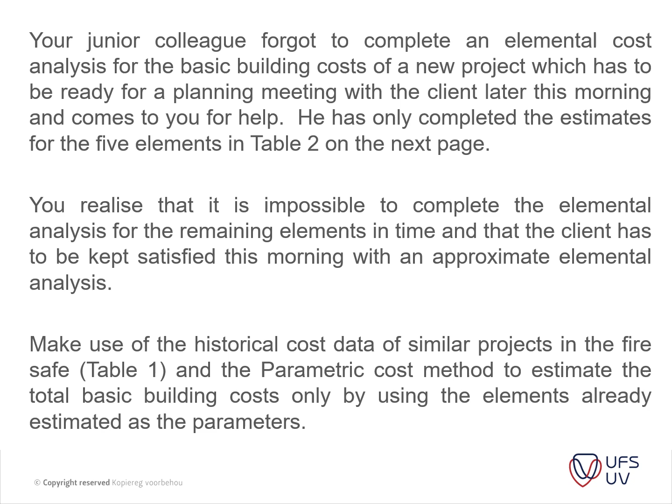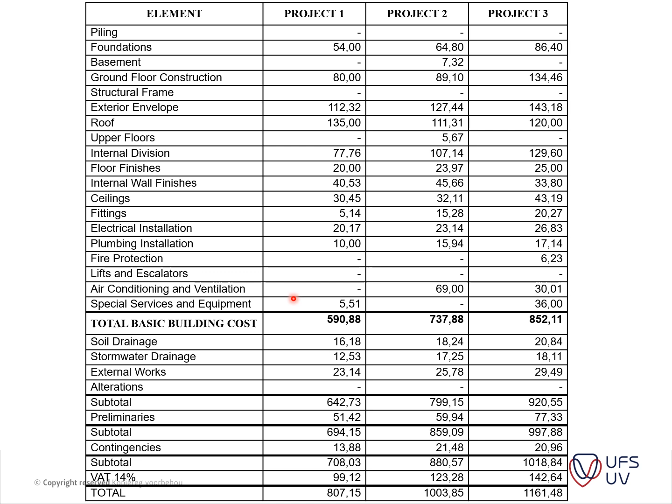Okay, so these are the 3 projects that are highlighted in the example. So we went through that previously. So you will see everything that's included here. So you've got project 1, 2, and 3 here, and then you compare what you have done so far in table 2, which is on the next slide, and then you just take out those items and utilize those items to get to the amount of work that you've done. So I'm not going to over explain that again. We've done it in the previous lecture.

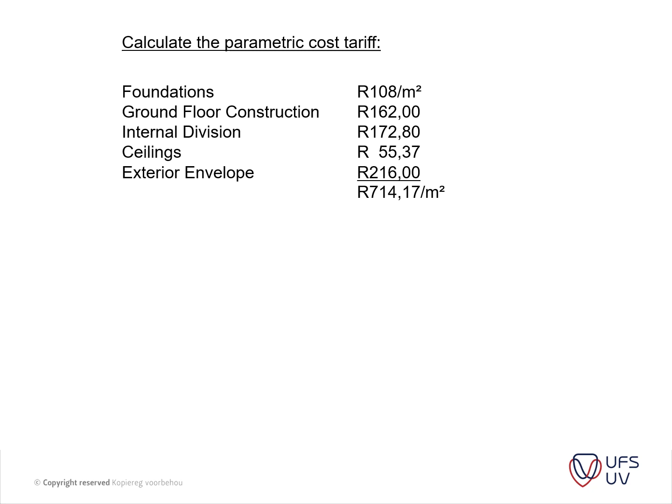So these are the items that you use, and then you continue to add up the ones that you've already calculated, and also see what your current rate per square meter is that you've calculated up to date. And then you go through the process of determining the parametric system. So from your table of the historical projects, you calculate what those items contribute, and you calculate the average price, and then you extrapolate that. Okay, so that's just a revision of last time.

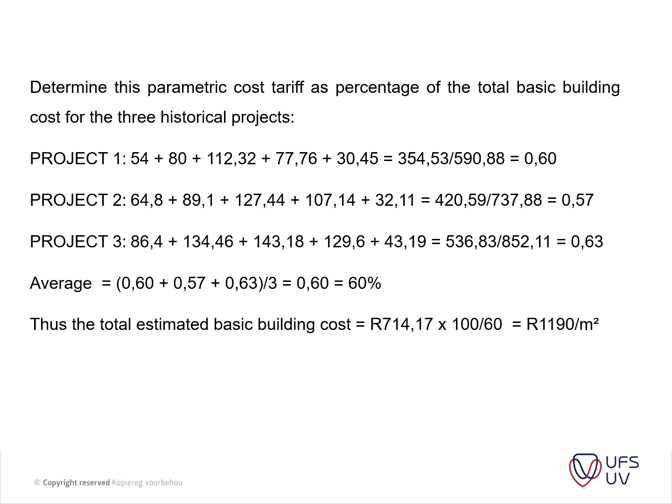So what I did with the residential students is to give them the following example. So this will be on the board, and then they've got the opportunity to actually complete the following. So if you want to do this exercise yourself, you can stop the presentation here, and then just do the estimate based on this as an exercise before I show you the answer on the next slide. So that's what the residential students did in class. So you can just have a look whether you are proficient with this, and then just mark your own estimate.

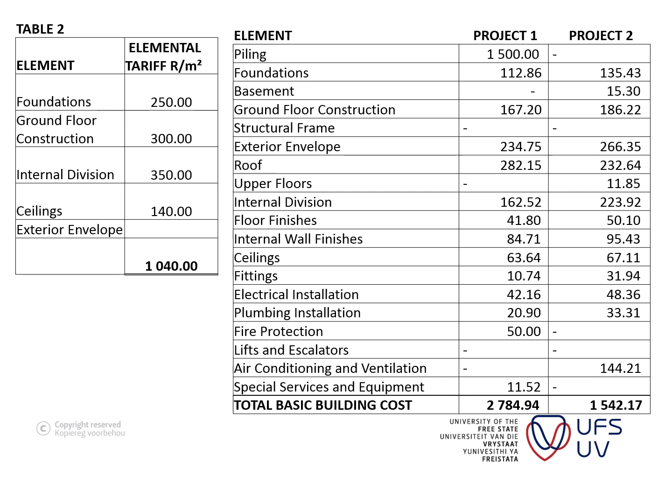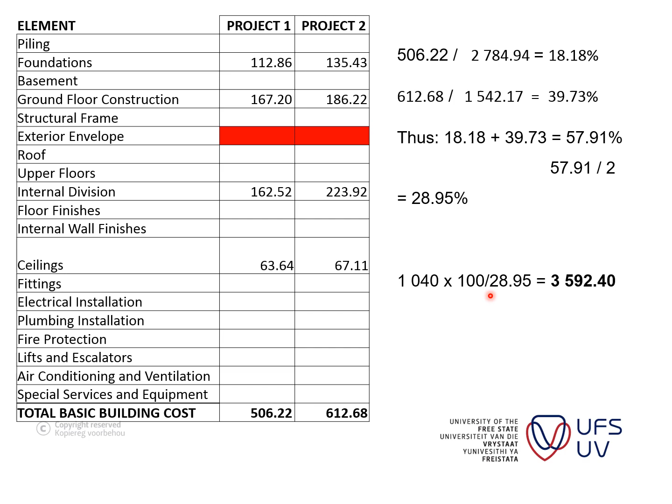Then for today's lecture, I'm just going to cover the last bit of the estimation methods and the theory of that before we actually start getting into the practical example. So you will have the opportunity in the next week. I'm going to post the first informal, if you want to call it that, so that you can start getting through that. So the detailed methods are the elemental cost analysis method up to component level.

Okay, so we've looked at the analysis method so far. Then the comprehensive quantities method. So the comprehensive method, we're going to delve into that, very similar to your accurate quantities. Your accurate quantities will be your BOQ that you produce and that you go out on tender with. So they are obviously more complex estimation methods than the previous ones. They take longer to complete and are the most accurate of all the methods.

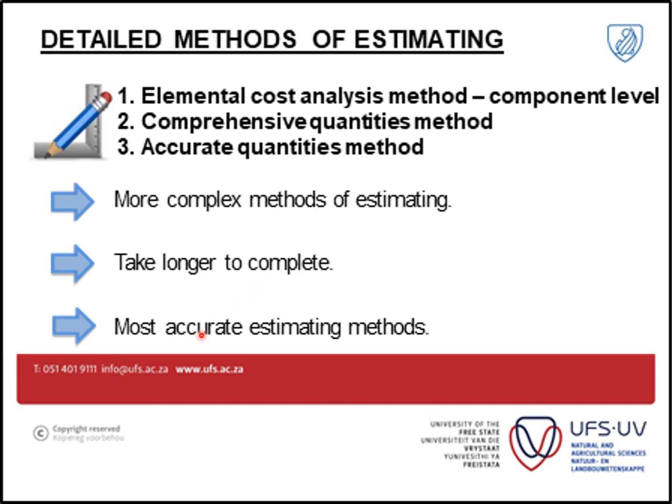So looking at your elemental estimate method first, we're going to spend some time on this after today's lecture still. So this is just the overview and the theory part of it. So it is divided into different subdivisions or components. Your component amounts are real amounts of different components expressed in a suitable quantitative unit of measurement, and the component tariff is the monetary value applicable to the different components expressed in terms of a specific unit.

So here's where you have your grouping of your elements that are related to your trades in your BOQ. Okay, so if you have a priced BOQ, you can easily calculate your elemental rates or tariffs that you need to include. So its possible applications are considerable savings in time if you have a proper setup. So I'm going to share an example with you on Excel that you can use whenever. WinQS also has a nice example that you can use, which already has the necessary links, but some of you might not have the opportunity to actually download WinQS.

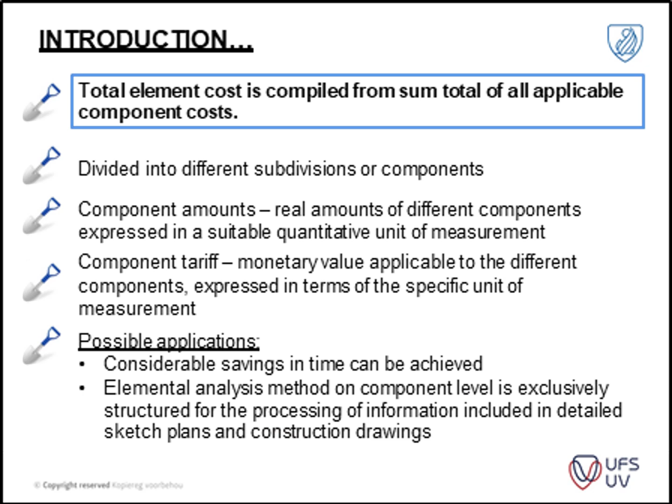And then the elemental analysis method on component level is exclusively structured for processing of information included in detailed sketch plans. So obviously you need a lot of detail to do an elemental estimate at component level.

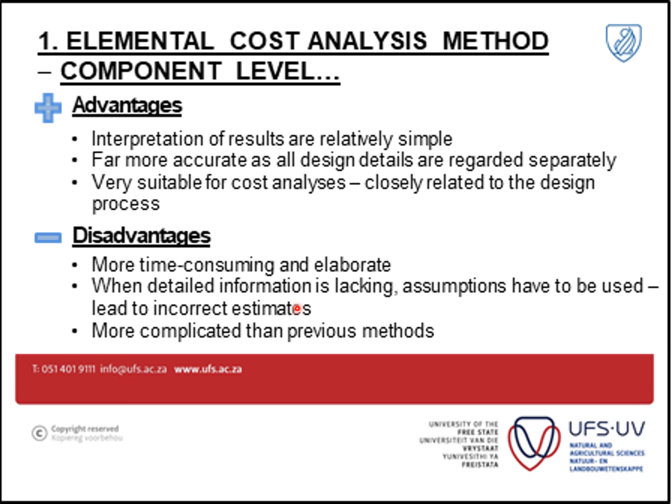So the advantages: the interpretation of results is relatively simple, far more accurate than the previous methods, very suitable for cost analysis, closely related to the process. The disadvantage is the time that you need. When detailed information is lacking, you have to apply a lot of assumptions. So when you get to your assignment, you will see that yes, you will have to make some assumptions to improve your estimate. It's more complicated than previous methods.

Okay, so just a practical example, I'm not going to go into this. In your study notes, you will see a very simple example. Previously, in the module, I included a more intricate example, and I found that it was just too much for some of the students. Some of you who have worked on the elemental estimate might find this a little bit trivial, but the process is the most important thing that I want to assess going forward.

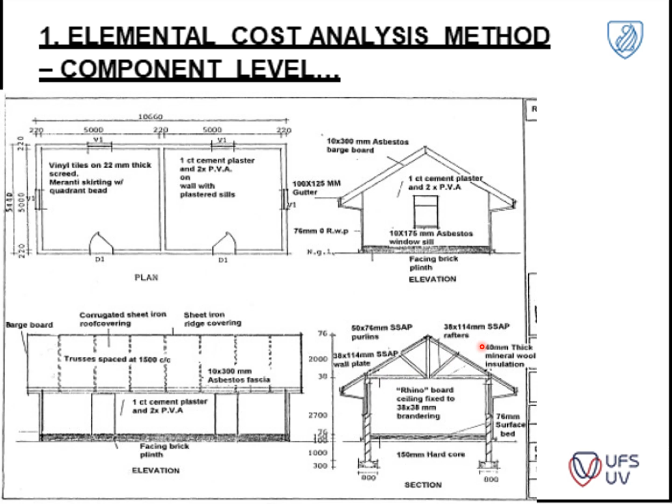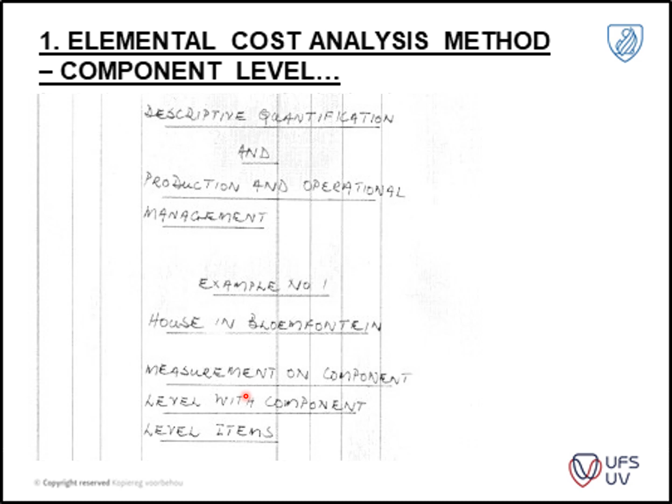So you will see this drawing in the annexures of your study notes, with a hand drawing, where your dimensions are taken down. This is how you usually do your BOQ and your descriptive quantification dimensions. So you should be very familiar with the processes involved in this, where you divide your project into the primary elements and everything that falls underneath that. So you've got your primary elements, the element of foundations, components, etc.

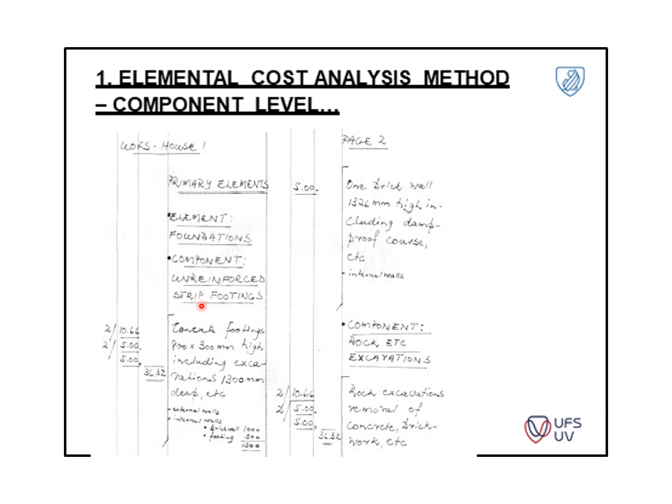Okay, so then getting to our comprehensive quantities. This is, as I mentioned, very similar to your BOQ method. But it's a tweak of how you measure your comprehensive quantities or your BOQ, where you don't have all of the information available, but the information that you do have available, you measure as if it's going to go in your BOQ. So it is basically working with preliminary information to start producing your BOQ that you're going to use to go out on tender with.

So it is required for different purposes. Cost estimation is one, and it differs only very slightly from the elemental method of analysis on the component level. Okay, the thing is, you're still grouping your components in accordance with the guideline as per the dim sheets shown in the previous few slides. The component amounts are mainly subdivided into items and measurements.

So what you're basically doing is you've got your groupings of your quantities as per your elemental method up to component level, but then underneath each one of those you take what contributes to that component and you break it down further. So it's the trades that are included in that component; you break it down further, depending on the amount of information you've got and the time that you've got available to actually do that breakdown.

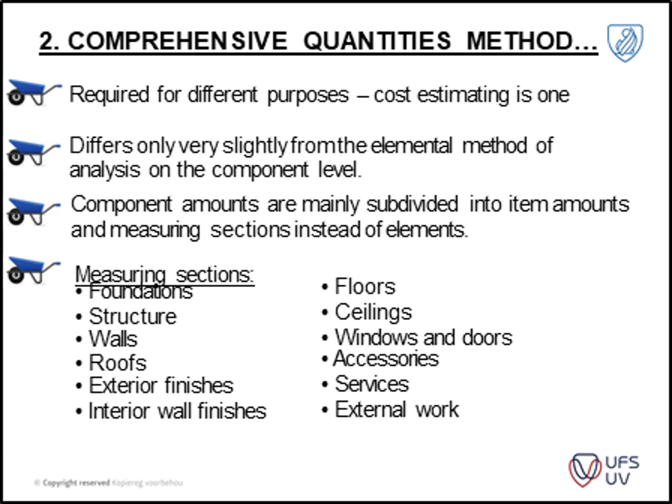So the measurement sections are usually your foundations, structure, walls, roofs, exterior finishes, interior wall finishes, your floors, ceilings, windows, accessories, services, and external works. So you can see it's starting to look a lot more like the trades that you compile your BOQ from. Okay, so the total is represented by the total of all the different sections and values together with the provision for unforeseen expenses.

Not as structured as the elemental method. There are no guidelines on this method, although it's based on your standard system and your guide to elemental estimation. It's a combination of the two. It's almost like the middle ground between your elemental estimate and your final BOQ. It requires considerable experience because you need to understand which items are not included in this estimation method.

Whenever you do the estimation, you will then allow provisional sums or contingencies, etc., to fill that gap of the information that you don't have. Tariffs should be adapted continuously to make provision for market movements and kept up to date. Okay.

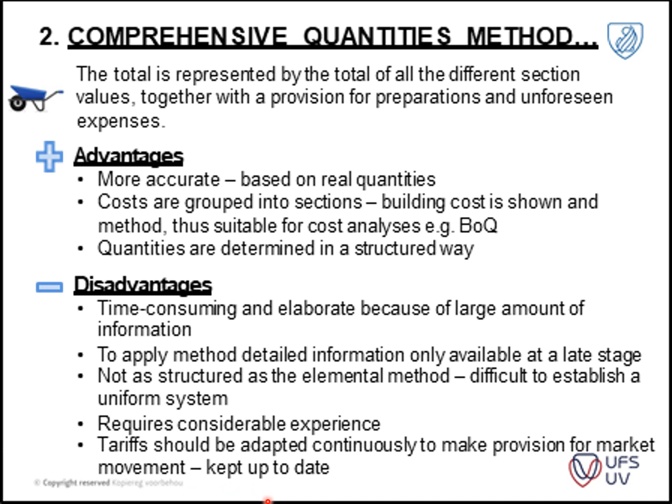Then we get to our accurate quantities, and you will see the theory on this is also not too much because it's covered in other modules. Accurate quantities are needed for all BOQ contracts, taking down all item amounts in detail from the drawings strictly in accordance with the stipulations. Guidelines like your standard system or your SANS measurement system or your British system. There's a whole lot of different measurement systems that you can use.

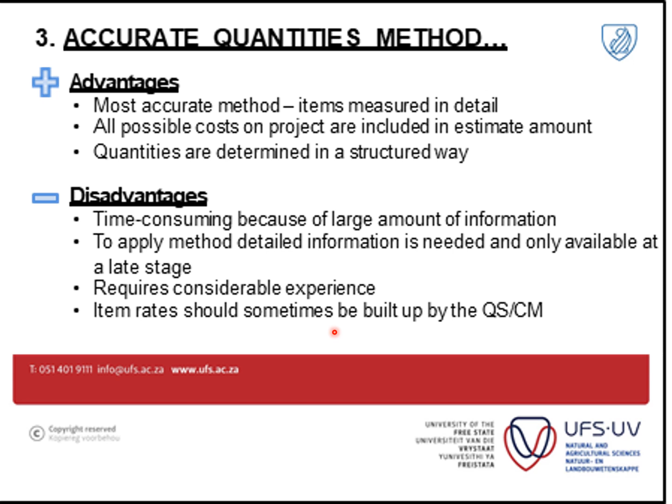The disadvantage is obviously the time. To apply the method, detailed information is needed to actually build up your descriptions and your quantities. It requires considerable experience, and the item rates should sometimes be built up by the QS or CM. Okay, so you won't always have historical rates that you can use in your BOQ, and thus you will have to build up your rates in your BOQ.

So this is a very short introduction to detailed methods, but obviously, as you will know, the detailed methods come down to the practical work. So in the next few sessions, we'll focus on that much more.